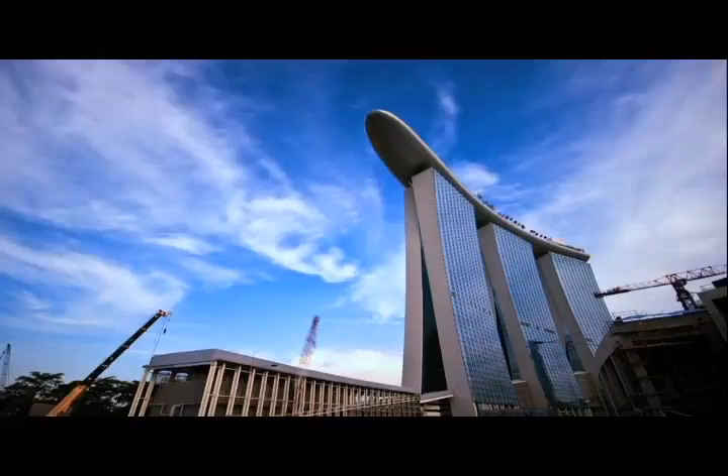June 23, 2010. The completion of the Dream Building has changed the Singapore skyline. Beyond the scope of imagination, it's a structure that few believed possible to build. A 21st century architectural miracle, the Marina Bay Sands Hotel.

Singapore is a city with diverse and adventurous architecture. Marina Bay, a prime coastal site. It's the gateway to Singapore. The government's decision to develop the area centers on turning it into a tourist hub. The site was put out to tender. The Las Vegas Sands Group of the U.S. was finally selected as the company to carry out the project.

The Las Vegas Sands Group proposed a dramatic and distinctive design for the site, a building that would capture everyone's attention, a landmark, an icon. It's unique. With 2,561 rooms, it's more than just big. 57-story towers with SkyPark reach 210 meters into the sky. 3 towers consist of 2 legs. The largest inclination is a staggering 52 degrees, 10 times greater than the Tower of Pisa.

Topping it all is a massive boat-shaped SkyPark. The size of 2 soccer fields, it is 343 meters, 20 meters longer than the Eiffel Tower is tall. It's not only eye-catching, it's a challenging design. Even the architect of this 21st century Tower of Pisa wasn't sure it could be built.

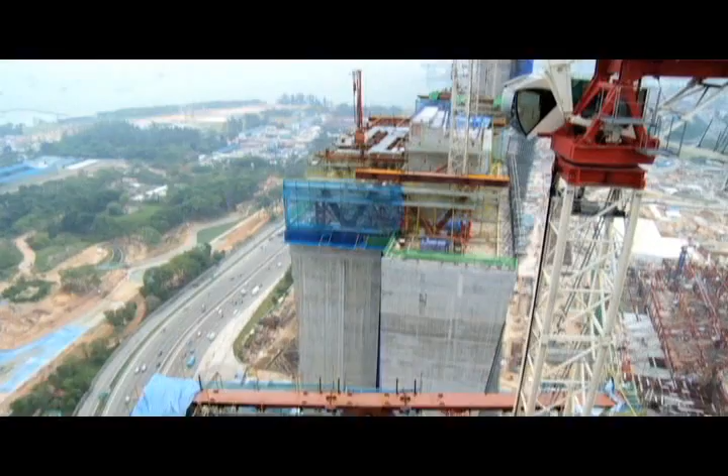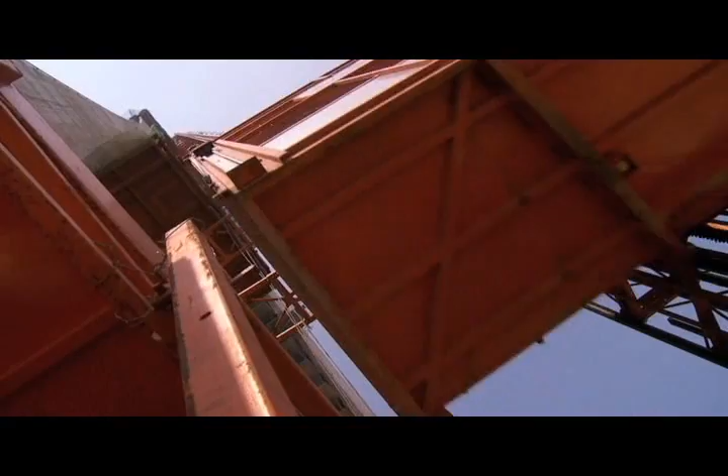14 companies vied to claim their place in architectural history. Just 4 made the shortlist: Korea's SsangYong Engineering and Construction, as well as companies from Japan, France, and Hong Kong. SsangYong Engineering and Construction won the competition. Their bid was not the lowest, but they were the only company that guaranteed to complete the construction of the unique incline towers within 27 months.

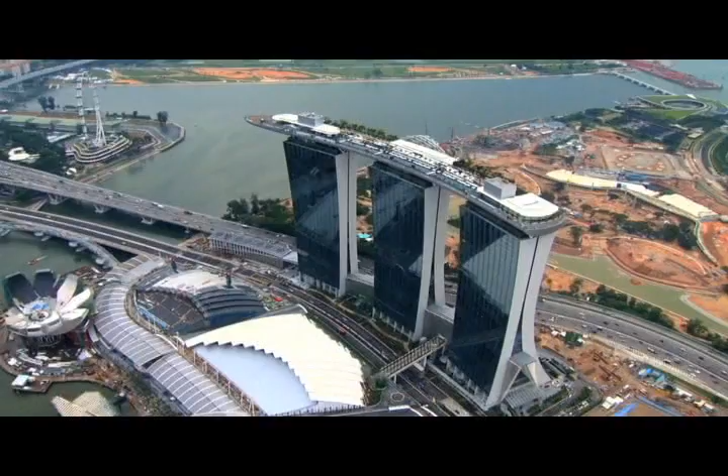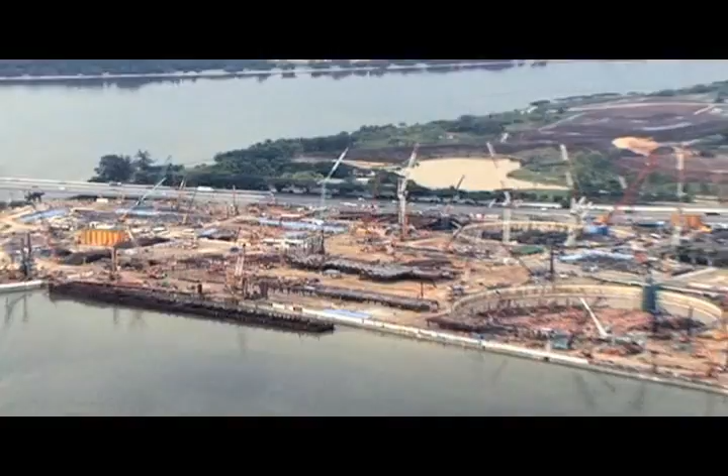The Marina Bay Sands Hotel could only be built through SsangYong's expertise with modern architectural technology. Because the hotel stands on reclaimed land, has a unique structure, and needed to be built in a short time, new and innovative building methods were required. Because the hotel was built on a landfill, the first challenge was to build a circular diaphragm wall that could withstand the high pressure of both the water and the soil.

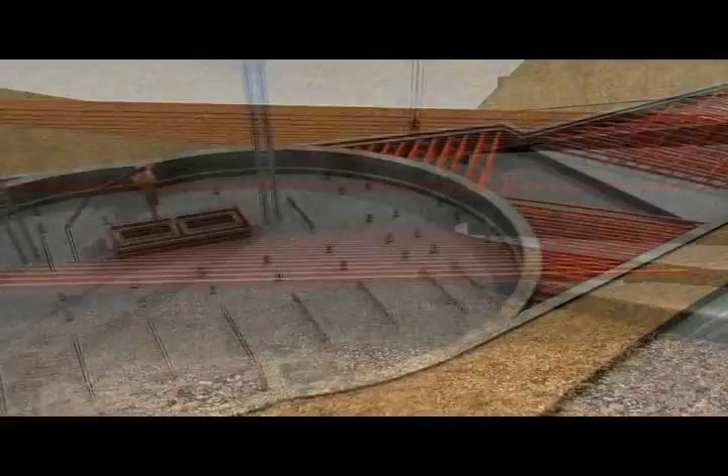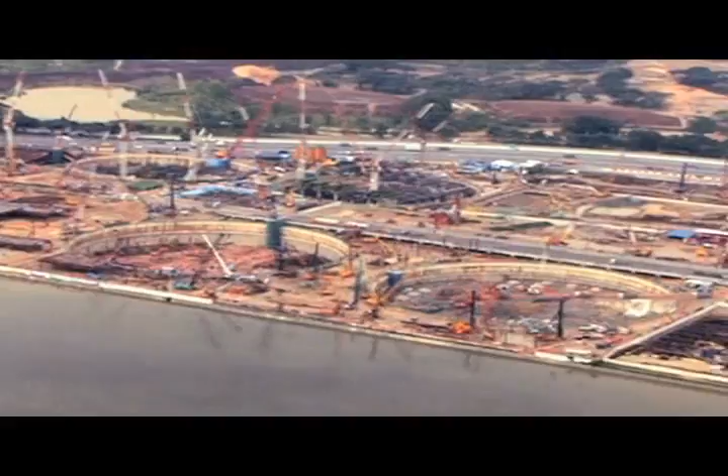In the early stages of constructing the complex underground structure, transportation routes for materials and equipment had to be secured. At the same time, the stability of the foundation and the time constraints had to be considered. SsangYong chose the circular diaphragm in order to overcome such issues from the groundbreaking stage. Square and circular diaphragms were tested to compare the differences.

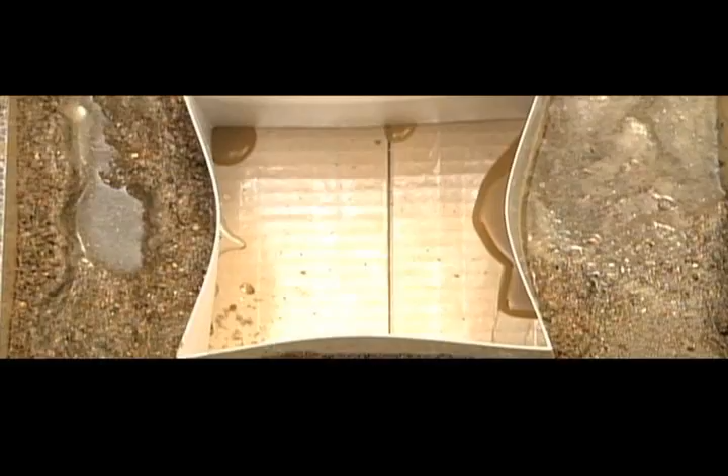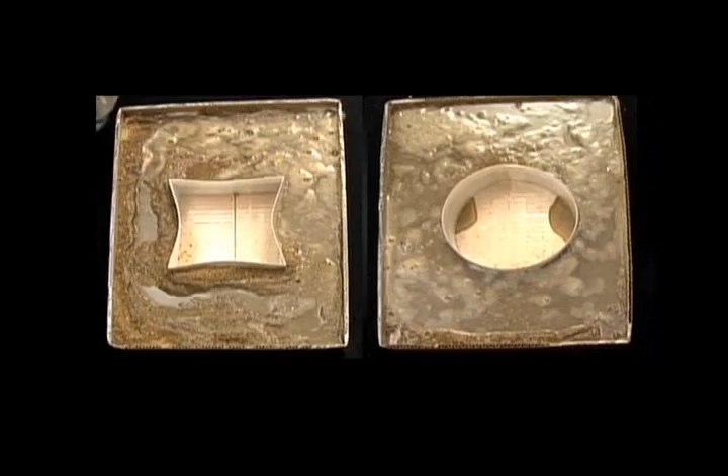When water was poured into a square diaphragm model, it immediately collapsed under the pressure. The circular diaphragm model was more robust. Under identical conditions, it barely changed shape. As such, a circular diaphragm proved to be more effective than a square diaphragm in withstanding water and soil pressure without the use of separate supports being installed and removed, resulting in a significant reduction in the construction period.

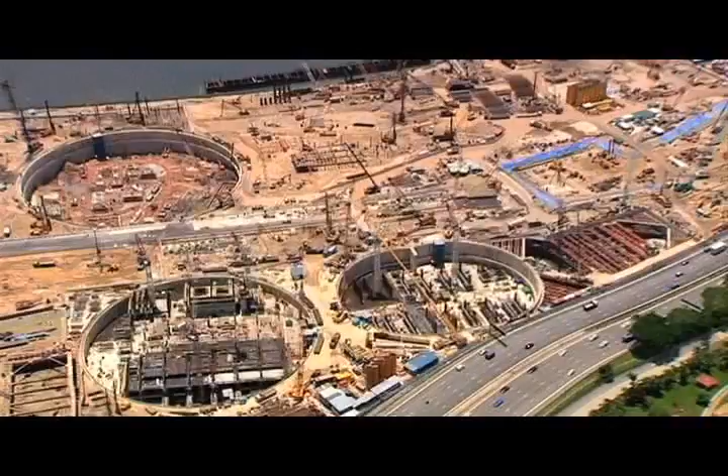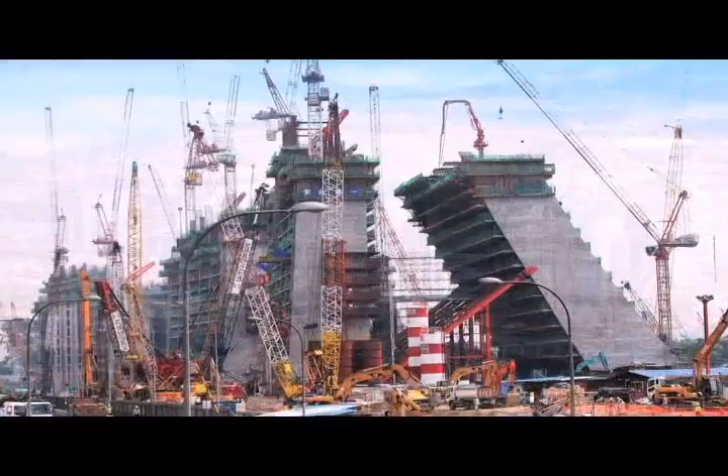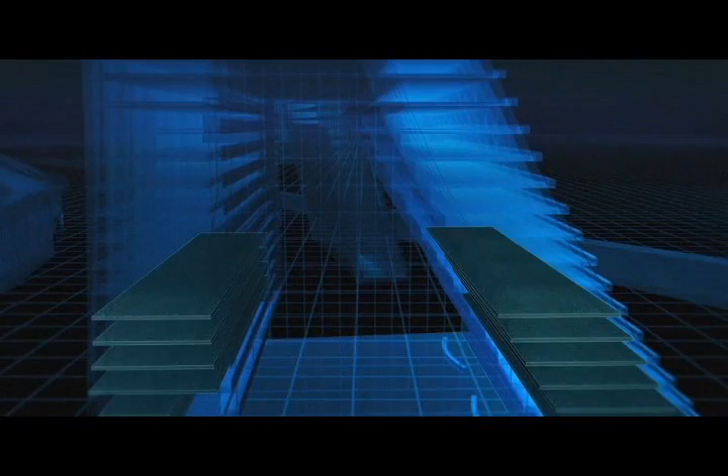The next challenge was to begin construction on the framework of the hotel with a maximum inclination of 52 degrees. According to the blueprints, the tower leg with the steeper slope must stand on its own until it meets the other leg at the 23rd floor. SsangYong conducted a test to see how high a building with an inclination of 52 degrees could stand on its own. When they reached the 8th floor, the structure collapsed.

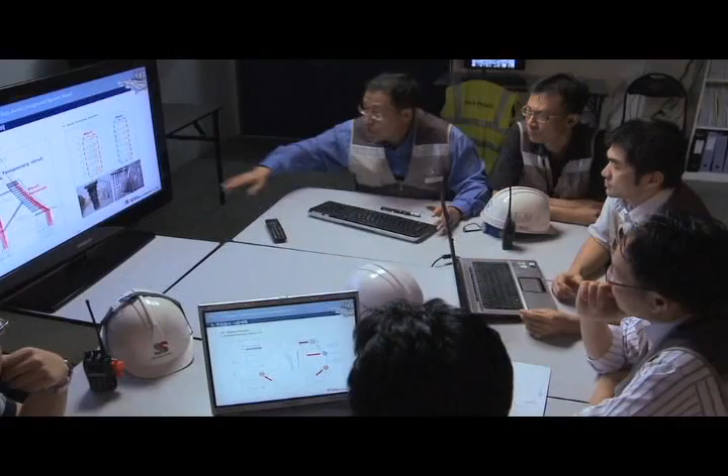Therefore, a way had to be found to hold the 2 legs up until the crucial 23rd floor. This was not possible using any existing construction methods. Propping up the 2 buildings would be the simple solution, but simulations showed this also failed. Large cables like tent ropes could be used to hold up the legs, except this was impossible because the cables would need to be anchored in the middle of a nearby highway.

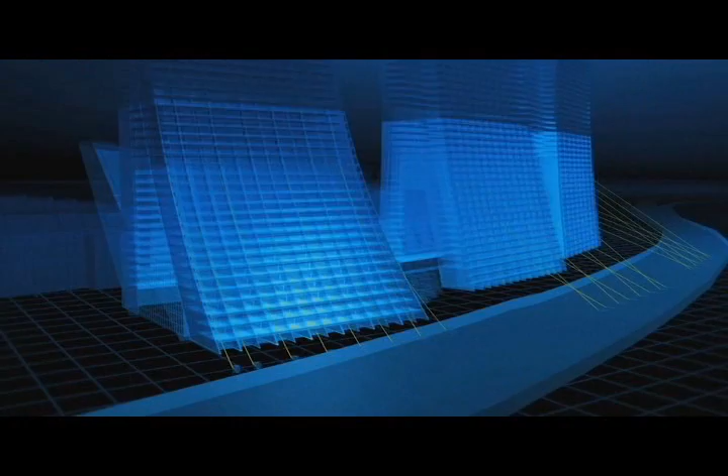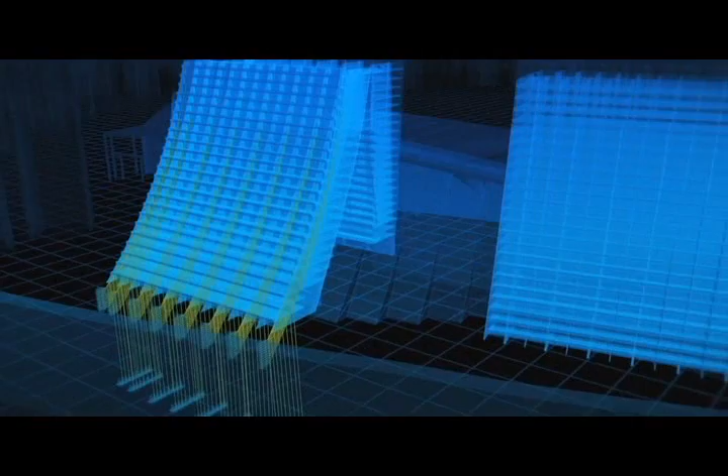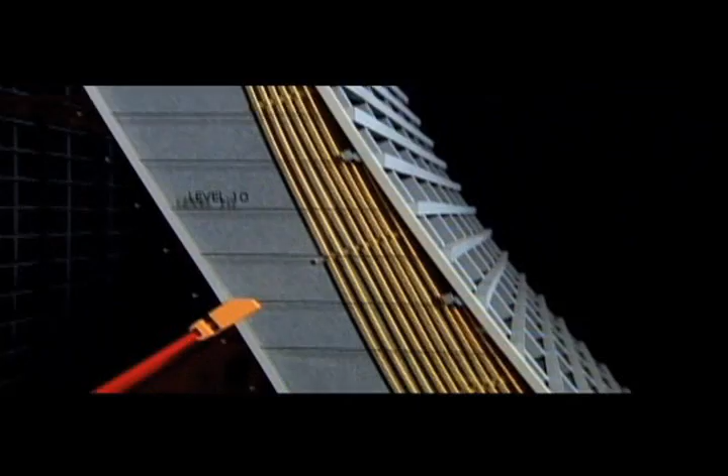In the end, SsangYong engineers came up with the innovative idea to build the cables inside the legs. After numerous reviews and simulations, the post-tensioning process began. The post-tensioning process inserts cables directly into the building. When the cables are taut, the building can stand on its own. First, SsangYong placed a maximum of 96 cables within each wall and tightened them to hold the building in place.

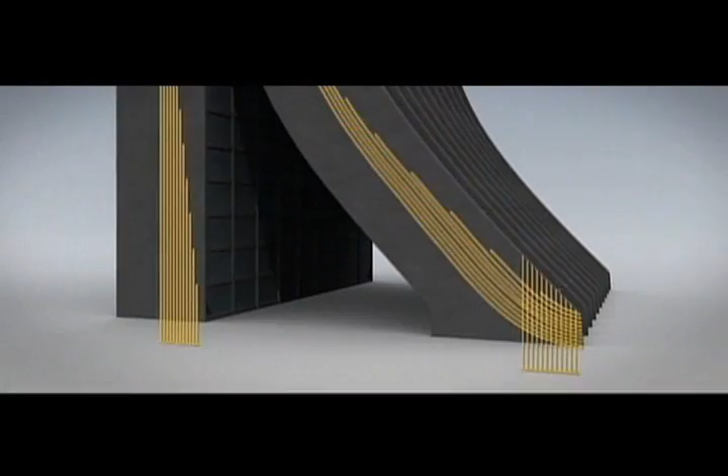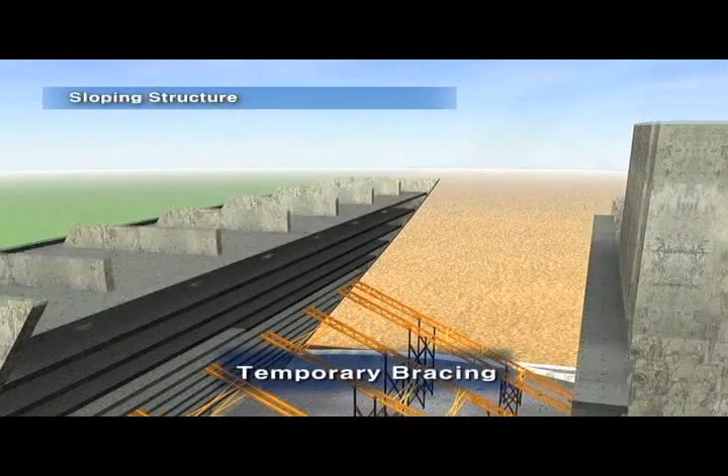Once the cables were in place, anchors were embedded 4 to 5 meters under the buildings so that the cables could be tightened as each floor was built. The weight of the building was shifted to the other side and bracing was set up to provide temporary support and ensure the safety of the construction. 3 sets of 8 temporary bracing props were set up at the 8th, 14th, and 20th floors. However, the post-tensioning process had limitations.

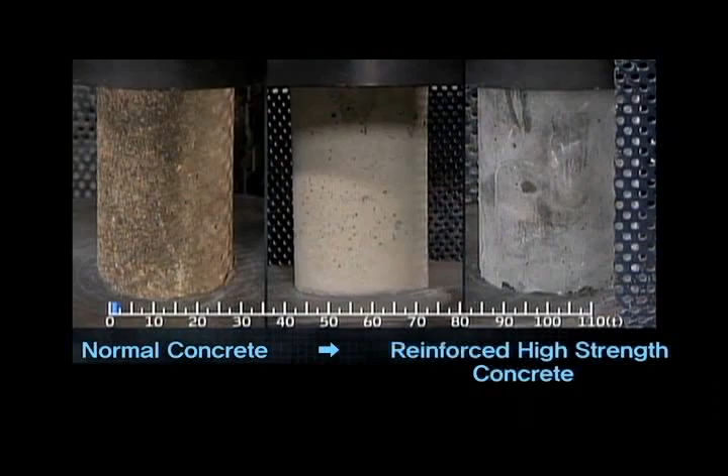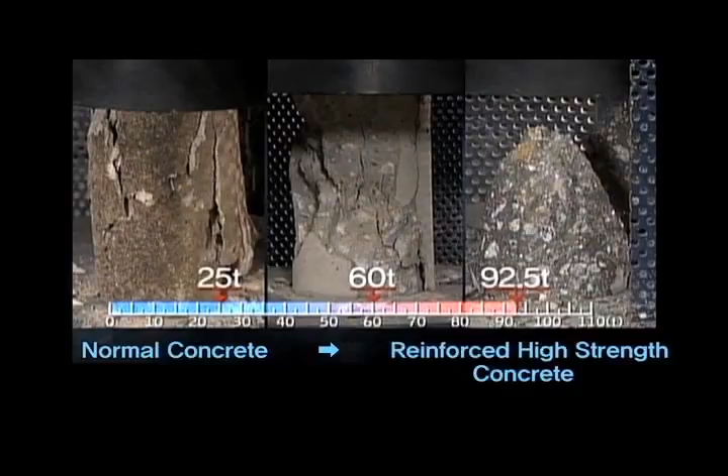Tightening the cables meant applying pressure, but if the pressure is too strong, then the concrete would crack. To counteract this problem, SsangYong also made use of reinforced concrete. The walls needed to be thicker to hold the cables, but reinforced concrete made it possible to make them thinner, thereby satisfying both design and safety needs.

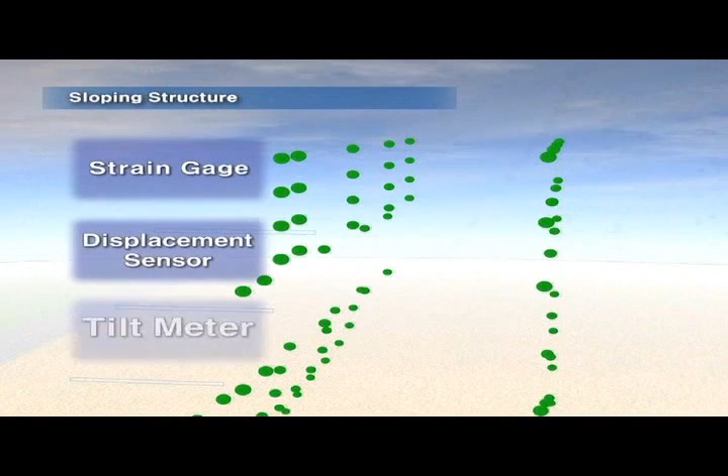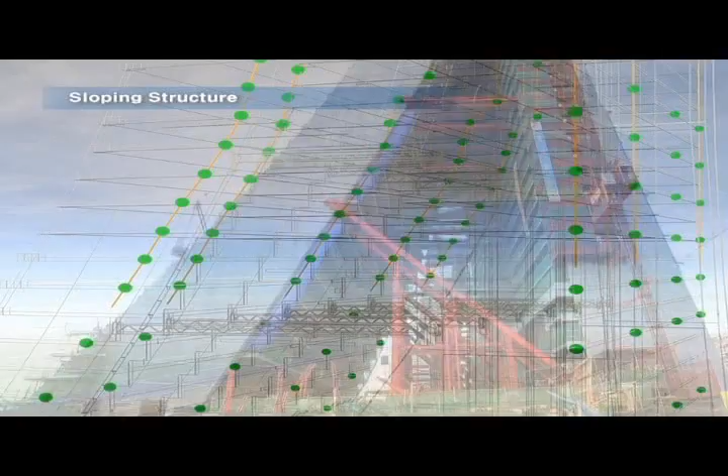Furthermore, hundreds of sensors were placed at strategic points in the props and the building to monitor the angle and pressure. The sensors instantly sent SMS text messages in real time to 20 engineers when even the slightest problem was detected. When the 2 legs meet at the 23rd floor, the towers can stand unsupported. The post-tensioning cables and temporary bracing is then removed.

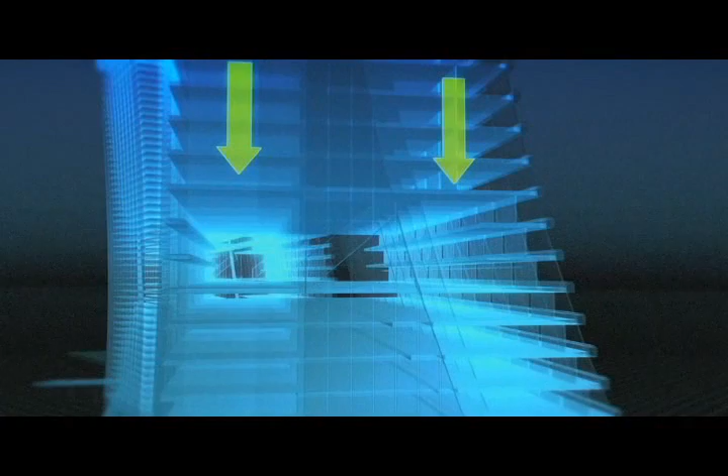However, a problem still remained. The immense vertical weight of the structure once it was finished was a major challenge. Because it leans to one side, a tower will topple over even at the slightest impact. The higher the inclination, the less weight it can hold up. This meant that the straighter leg had to support more of the weight.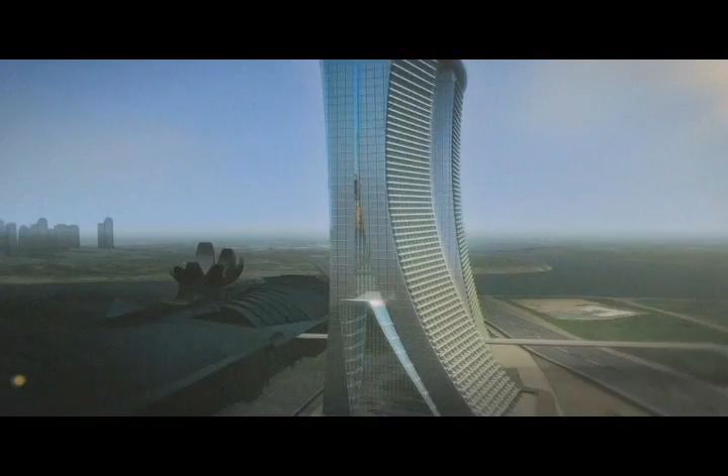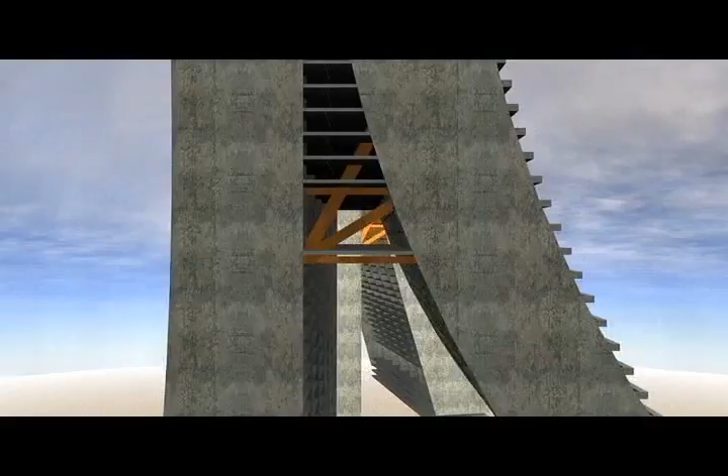The solution lay in the transfer trusses built into the walls, each weighing 3,000 tons. Transfer trusses help distribute the weight of the building evenly. SsangYong installed transfer trusses in the walls of 12 floors between the 16th and 28th floors of Tower 1, which has a maximum inclination of 52 degrees, and 4 floors between the 22nd and 25th floors of Tower 2 with a lower inclination.

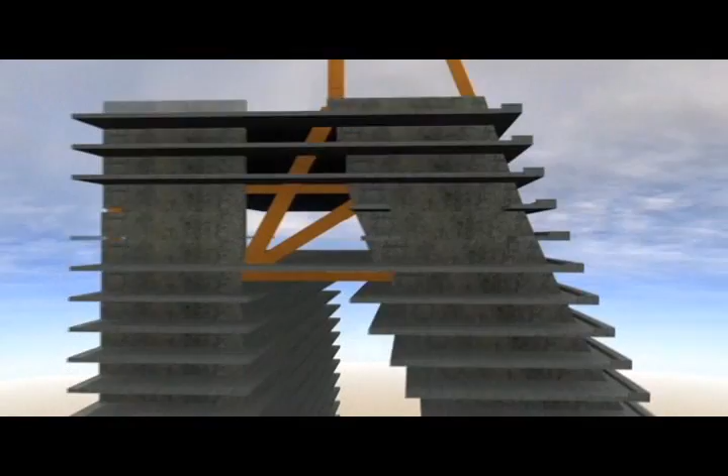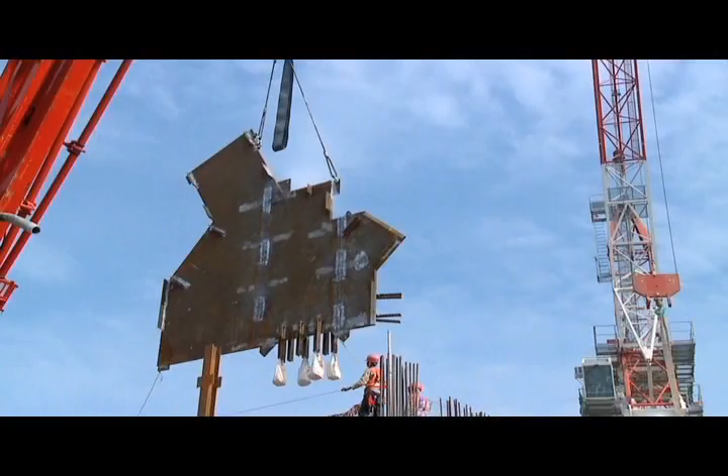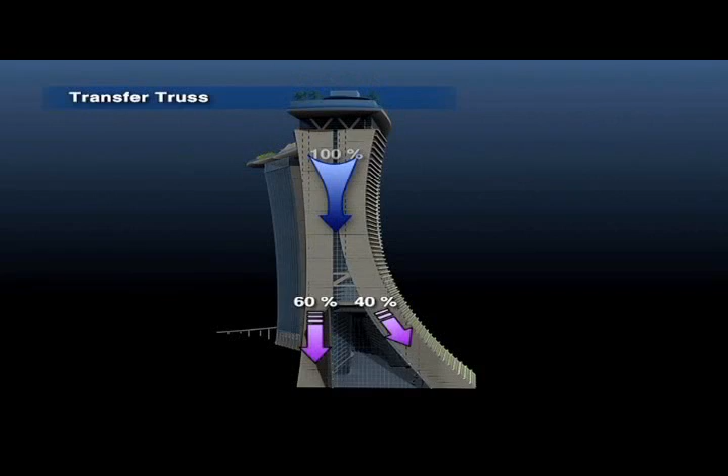The transfer trusses were moved to their respective levels by crane. They were then positioned on each floor and assembled to create a huge structure. 60% of the weight was distributed to the tower with a lower inclination, and 40% to the tower with a higher inclination to form a safe structure.

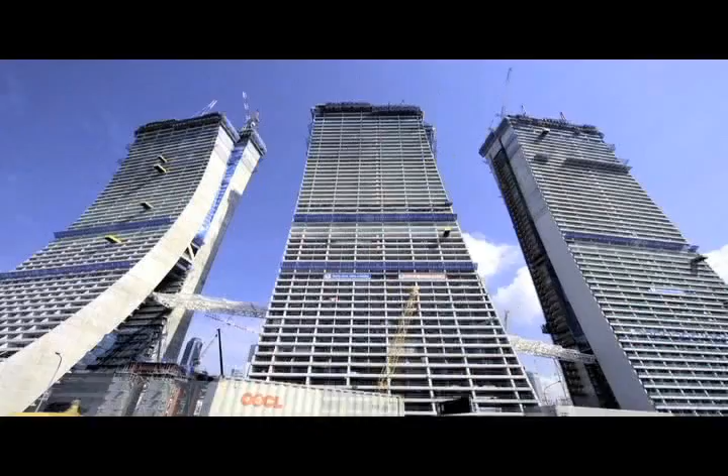Once the most difficult part of the inclining structure was completed, the construction of the framework began to pick up speed. Construction of the framework for a hotel with a 52-degree inclination was completed perfectly in 18 months, with innovative creativity and technology utilized throughout. There was still more to do. The element that would define the hotel as a new Singapore landmark still remained: the SkyPark.

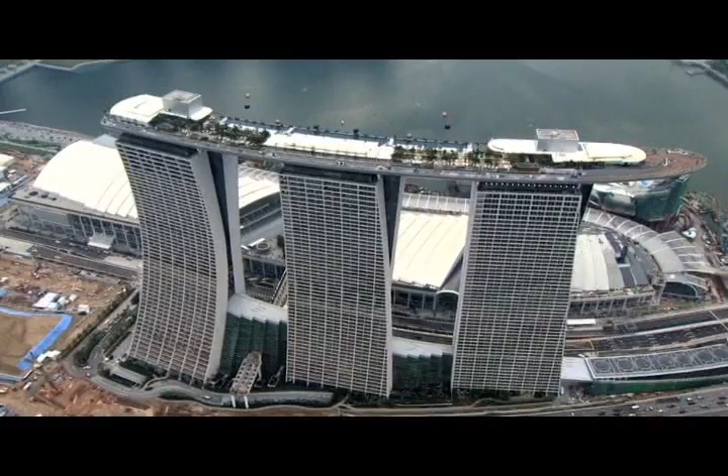When the Marina Bay Sands Hotel was complete, the boat-shaped SkyPark floating in midair would catch everyone's eye. The SkyPark would be a dream space consisting of a swimming pool and spa, with a 360-degree bird's-eye view, a restaurant, and an observation deck poised 210 meters above ground. It weighs a staggering 60,000 tons, equivalent to 43,000 sedans, with 7,700 tons of steel framing.

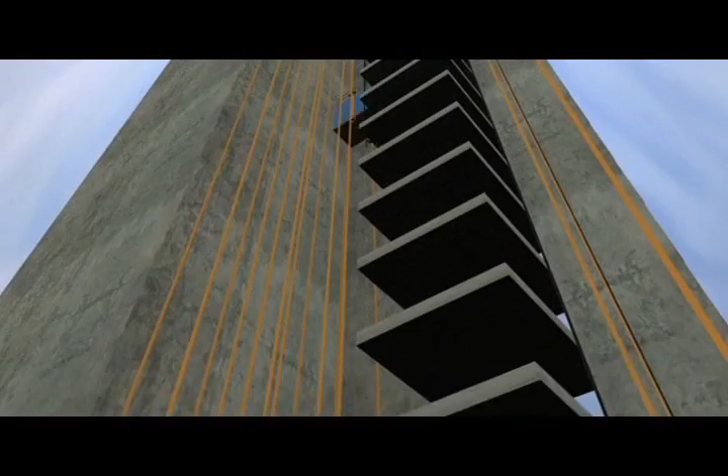What is even more surprising is that the 67-meter observation deck, the size of a Boeing 747, cantilevers into thin air with no apparent support. The hotel's central elevators also contained a secret to reducing the construction period. Jump lifts. The use of jump lifts means that from the initial stages of construction, elevators are built into the basic framework so that they can be used to transport materials. This also eliminates the task of installing elevators later, resulting in a significant reduction in the construction period.

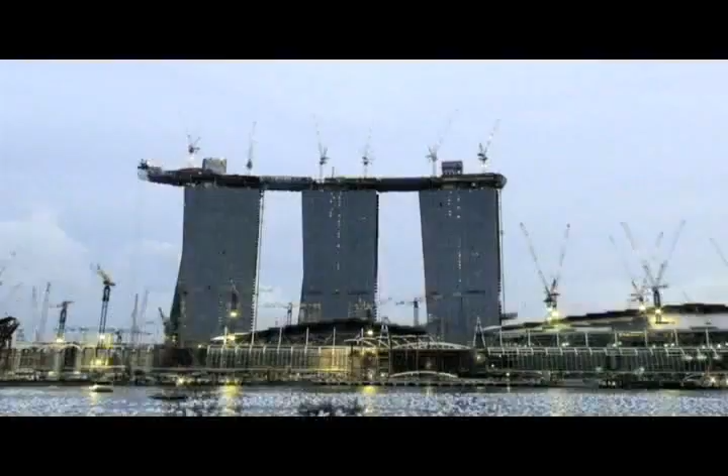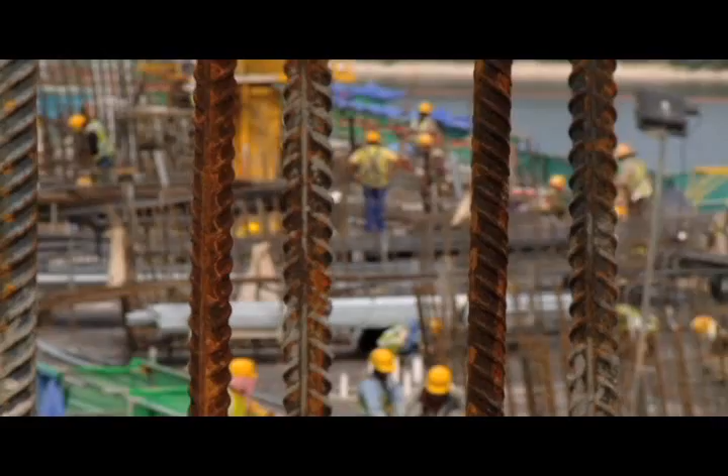SsangYong drew on various processes and technology that no one had ever thought of to accomplish the feat of raising one floor in a mere 3 to 4 days, and to build a monument of 3 levels underground and 57 stories above ground on reclaimed land in just over 2 years. It was a truly massive project. 32,500 truckloads of concrete and approximately 20,000 kilometers of steel reinforcement bars were used. If laid end to end, the bars would stretch from the North Pole to the South Pole.

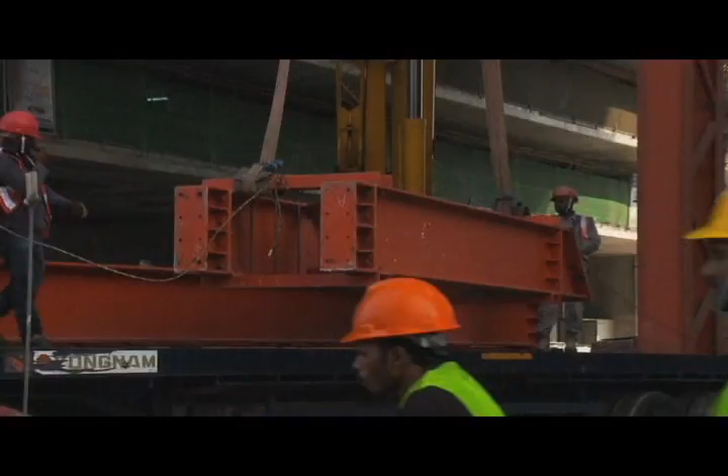This mammoth hotel with over 9,000 sheets of glass on just one side cost a staggering $890 million. Furthermore, working in 2 shifts 24 hours a day, as many as 6,000 workers from more than 10 countries clocked in 12 million accident-free man-hours. This was an unprecedented record, and yet another miracle in the history of architecture worldwide.

The grand opening of the Marina Bay Sands Hotel on the 23rd of June 2010 was a day that marked a new page in the history of architecture. 1,200 international reporters gathered to cover the opening ceremony. A dream hotel that not even the architect who first came up with the design believed could really be built. But a miracle happened, and imagination turned into reality before our own eyes.

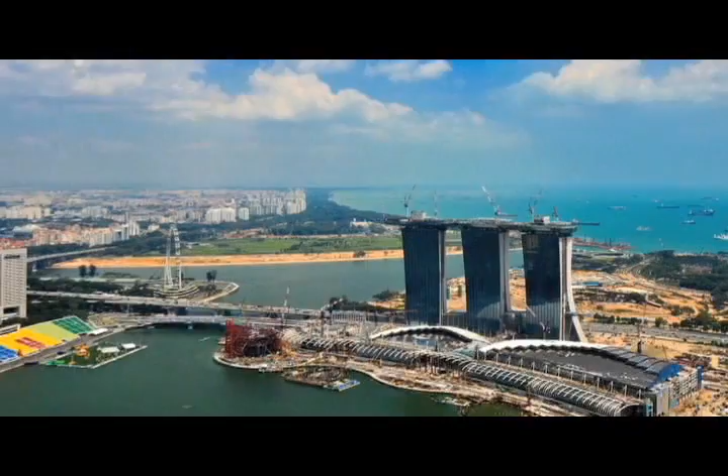There was a time when the question in architectural engineering was, who could build higher? Now, the question is, who can construct an unconventional building? Faster, safer, and closer to what imagination can conjure. SsangYong will continue to do its best to create masterpieces in architecture to be remembered throughout the history of mankind, based on original ideas, cutting-edge technology, and a passion to challenge the impossible.